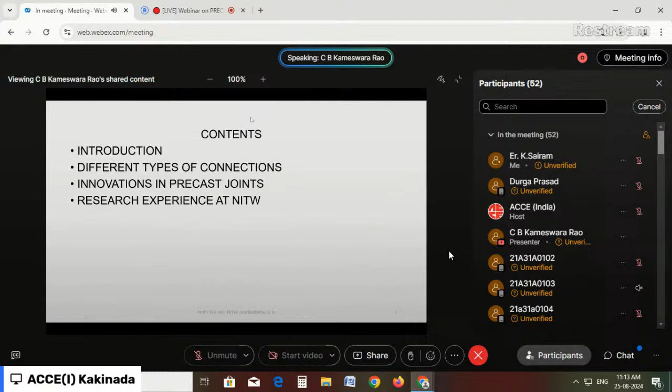I hope I am audible to everybody, and everybody can see me also, hopefully. Sometimes I use my hands to explain certain things, and remember this cursor, this arrow mark, I will be using it to point out things.

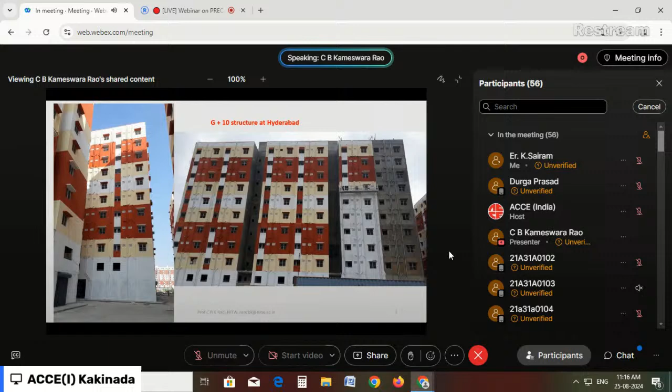So this building, once we use precast wall, precast construction, once it is finished, it's as good as any other equal structure. Now, if we just look into the basic thing, what is the main structural difference?

What is the main structural difference between cast in situ and the precast structures? That means here, what is the difference? Because it's a cast in situ. Difference between cast in situ and precast structures lies in the structural continuity.

Here, in this structural continuity, for in situ buildings, the inherent continuity is an automatic consequence of the construction process, because we are putting the shuttering and casting is done in a single go. So then the continuity is automatic.

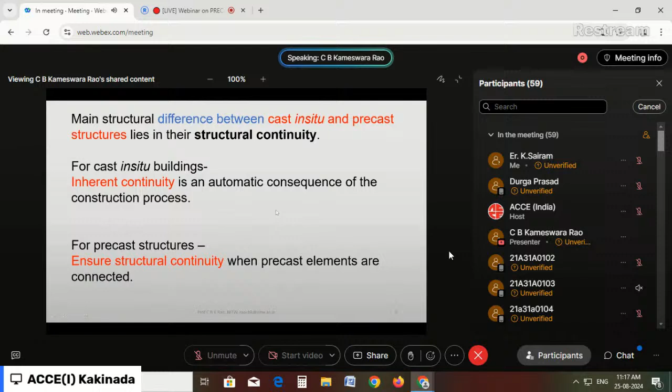Whereas in precast structures, we have to ensure structural continuity when precast elements are connected. That's all the difference. Once this is ensured, automatically the structure will be as good as equivalent to the cast in situ construction only.

Now, simply put, the joint and connection, a simple one. A joint is a meeting point of all the members in a structure, whereas a connection is an assembly of the adjoining members of a joint. That means when all the things are together, we call it a joint, and these members, when assembled, form the connection.

When you assemble it, by what means? You can think of different means of assembling them. A connection is an assembly of adjoining the members of a joint.

Now, what happens at this? Definitely at a joint, the actions of forces takes place, right? Just like our bending moment, shear force or torsion, whatever it is. So depending on that type of force, action of forces takes place at a joint, and the connection is to be designed to resist the action of forces.

So whatever connection we are making, just like in steel structures, we fix up the number of bolts or number of joints or the length of the weld. Here properly the continuity of reinforcement or whatever connection is required, that is to be ensured. Thus we can make a proper connection in case of precast structures also, particularly in concrete construction.

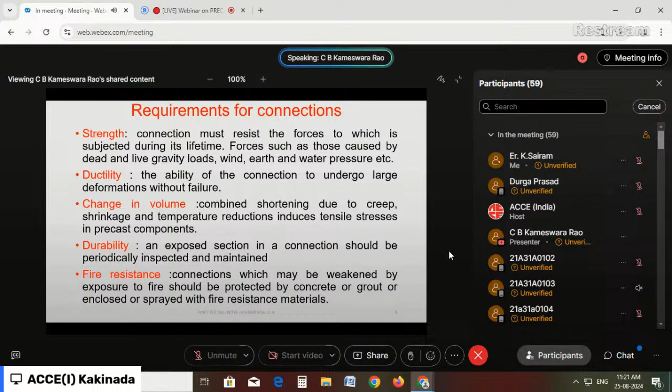Now, there's a code, IS 15916 of 2020. It's much better than the earlier code - this 2020 version is an improved one. It covers building design and erection using prefabricated concrete. This is a code of practice that is available and is to be followed in precast construction.

So connections and jointing techniques and materials - what are the provisions given in the code? Clause 9 talks about jointing. What are the permitted jointing techniques? Welding of cleats or projecting steel - that means from the members you can provide a cleat, or reinforcement can be left and overlapped and welded. So welding of cleats or projecting steel, overlapping reinforcement, loops and linking steel grouted by concrete.

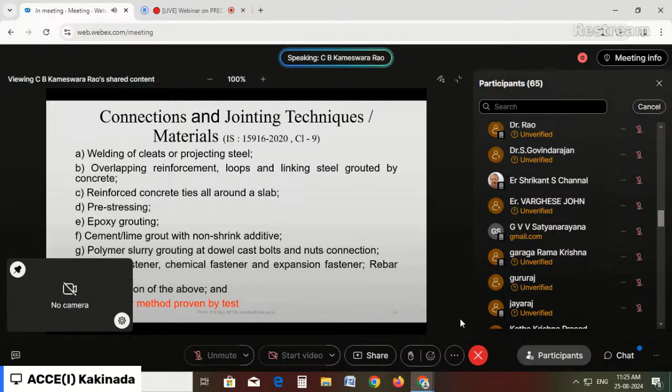And if you can prove it by testing and demonstrate it, that can also be used. So there is a lot of scope for inventing or finding a new method or technology, whatever is convenient to the site. This always happens - in precast construction, there's a lot of scope for invention and introducing new techniques.

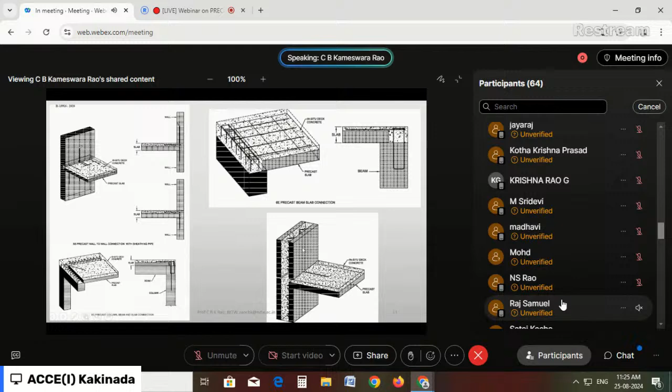These are some snapshots taken from the Indian Standard code. This is a wall and slab system here. Again, a beam and wall slab system, and this again the same way. And these are foundation and wall systems here. Again, these are the jointing by wall to wall systems. These are typically perimeter diagrams given just as schematic diagrams to explain some of the jointing systems.

Now I will explain the jointing system with the help of photographs here. So different types of connections here - I divide these types of connections into column to foundation, wall to foundation. That means first is the foundation, then either a wall can be connected to the foundation or a column can be connected to the foundation. Next comes wall to wall.

Again, wall to column, wall to beam, column to column, beam to column, beam to slab, wall to slab - the classification is done like that. What we are doing is the entire structure is now elementized, actually divided into different modules: foundation module, wall module, column module, slab module, like that. Now they are to be joined, one element to the other.

So normally this is the standard practice. There are some standard methods available. When standard solutions do not fit, and to develop an innovative solution, the designer must be prepared to work with connections in a more creative way.

So here, sometimes the conventional system may not work, then you have to think about a novel system. You can come out with a novel system also. Problem to problem, we can always come out with a proper connecting system. I'll now explain some of the connection systems one by one.

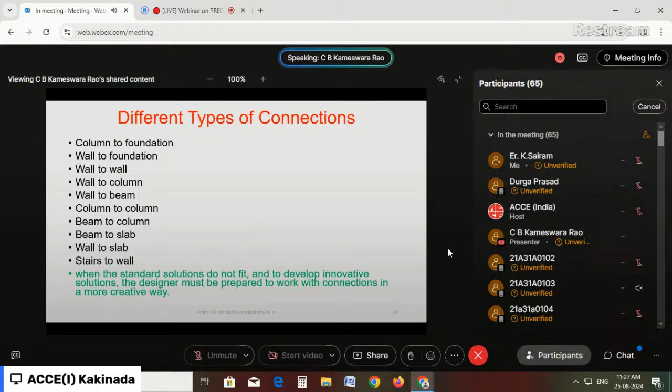Before that, a general classification: there are two techniques adopted for this connection or jointing. One is called the dry joint, the other is called the wet joint. The dry joint means the joint is accomplished by simply placing two members by means of fastening. Whereas the wet joint requires not only casting with cement, but also concreting and grouting material.

That means there are two ways. The members are brought together at the joint and the concrete is poured - that's called the wet joint. Once it gets hardened, all the members automatically become a monolithic joint, as good as monolithic construction. The other way is to bring the members together and use either a nut and bolt system, a pre-stressing system, or some other technique, wherein we don't use concrete.

So this is called the dry jointing technique. In wet jointing technique, concrete is poured at the site, at the particular joint. In the dry joint technique, we avoid this concreting because that's also a big headache in jointing. So dry jointing technique uses some other methods, just by fastening only. Most contractors, construction companies, or people like to have a dry joint because it avoids a lot of the work of making a wet joint.

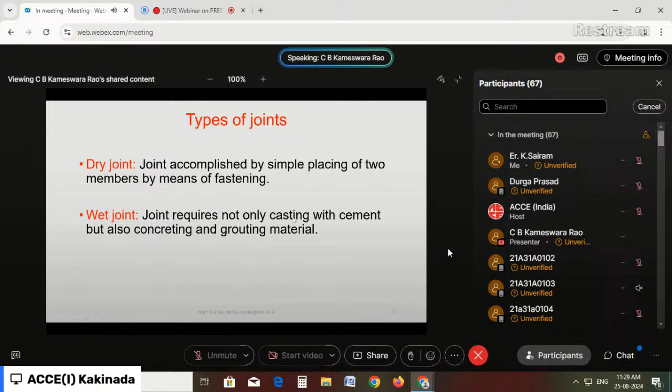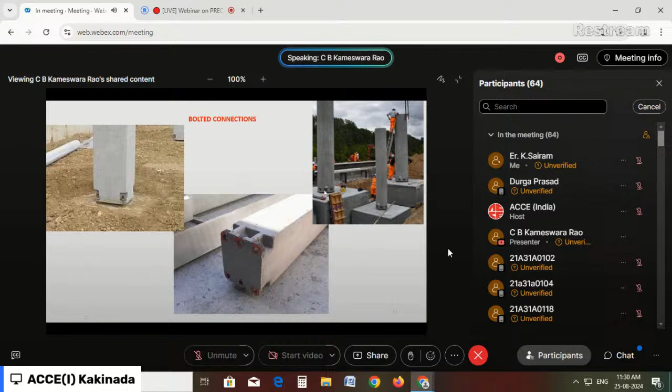So what has to be done is this particular joint should be capable of taking all the forces like shear, bending moment, and whatever it is. So this will be designed such that it will withstand whatever forces are transferred to this joint. This is dry jointing technique, and when we use this, it will be such that it will not get rusted - some concrete will be laid or it will be closed, but that doesn't mean it's a wet joint. It's a dry joint only.

Now let us see the wall panel to the foundation. Here we have to prepare the wall panel, and it will be connected to the foundation. That means to the foundation there will again be a strip-like footing there.

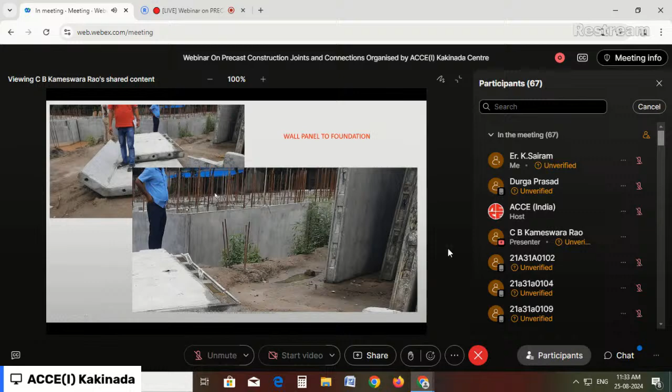Here also you can see the bars protruding outside. So this is the previous slide. These panels, once cast, will have the sleeves inserted right onto it, and it automatically becomes a connection to the foundation. One more photograph will explain this kind of connection.

So this is actually the foundation, strip-like foundation here. You can say it's a raft, completely raft foundation. From the raft foundation, these bars are protruding outside, and these are the wall panels, with sleeves here inside.

These sleeves are brought and this wall panel is brought and kept on this. Automatically it gets locked into it. Then here you can see the grout points. The grouting is done. So if you see here in the detailing part...

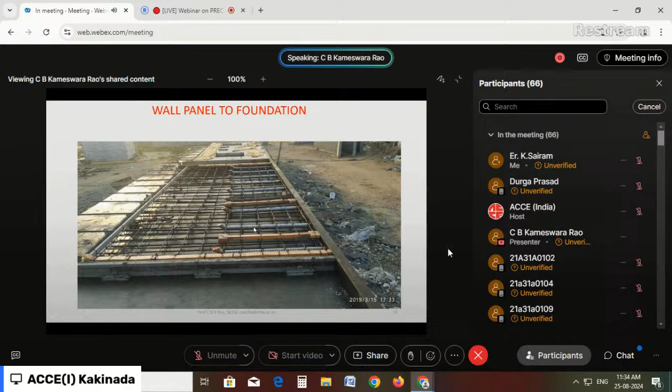Once this is a sleeve, automatically corresponding to this there is a bar. So precision is required in this while casting. There must be proper alignment. If there is a misalignment, it automatically becomes difficult to insert these rods into the sleeves. So a high precision is required, though of course there will be tolerances, but it can be done.

So this is the wall panel and foundation connection. This is a finished product. You can see here, this is the foundation, this is the wall panel. In this wall panel, one more wall panel is inserted. So like that, the entire construction can take place.

I'll take a few more examples in order to explain further. And since such gaps are to be closed, that will be closed also. I'll explain that too.

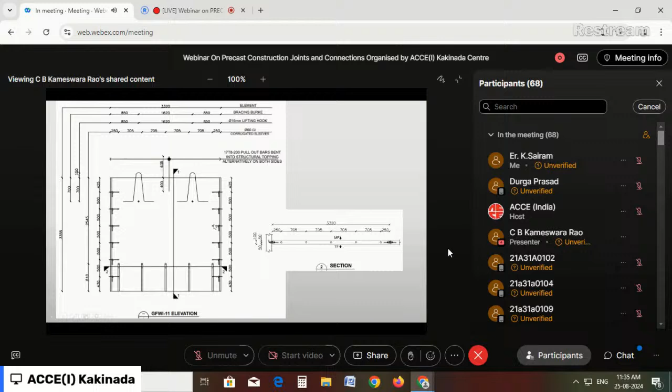While preparing a drawing for this particular precast construction, a lot of details are required. So here is a general drawing, but I took this to have better visibility, presented piece by piece. So this is a drawing which explains how these sleeves are to be provided.

The drawing preparation in case of precast construction - in ordinary construction if you make around 10 drawings, here we may have to do 10 times the drawings. So very detailed drawings are required, and every minor detail is to be completely explained. Otherwise production becomes difficult. For the production purpose, we have to provide all the details in this.

So here you can see this is a corrugated sleeve, this is to be shown. This is a bar that is left over, which will insert into the next one.

And in this drawing we will also have to show the MEP inserts, because these are PVC conduits for electrical and plumbing activity. We have to show exactly where this is to be placed and all those details, so that it can be inserted right into the precast element. So once the element is done, there is no need for chipping off or anything.

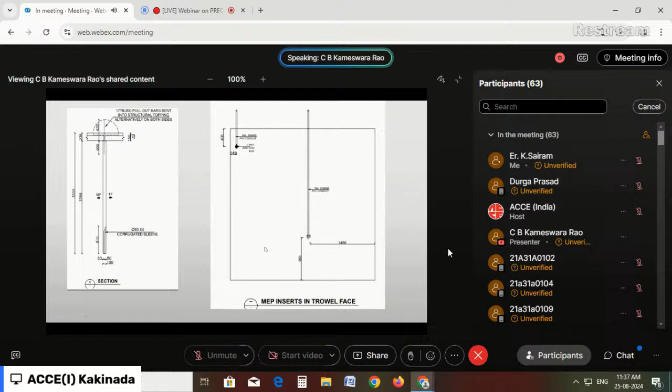This is a detailed drawing. Now let us see the slab and wall connection.

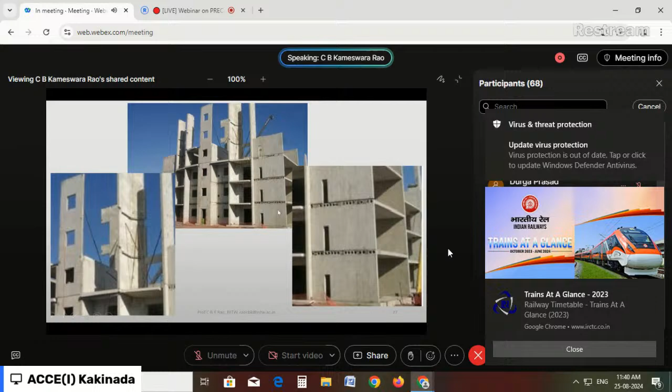That means this one panel is actually made in order to form a three-storied panel here, whereas here this panel is a 1-storied panel. So depending upon our elementization, our modularization of the elements can be done in such a way, depending of course on the weight the crane should be able to lift. So suitably I can make a single wall panel or a 3-wall panel, and these 3-wall panels you can see here are supported and resting on it.

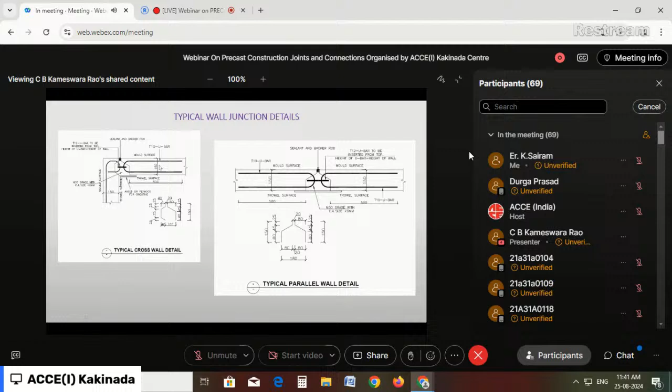So this is an example of an L-shaped connection, and this is for the continuity of the member side by side. Here the bars are looped like this. If you observe my pointer, this particular part is left open. That means a precast unit, this is one unit, and this is another precast unit having an uncast part like this.

These two parts are brought together, and there is a small gap of 5 or 10 mm, which will be closed with a backer rod. Some plastic tube will be inserted, and here we will put another stopper arrangement. So these are the loops that are protruding outside from the precast unit. Then these are connected, and this is grouted or concreted, whatever it is. Thus I make the joint, one kind of joint, as the L joint I can make.

So you can see the details of this particular connection here, and how actually this grooving has to be done. So every detail needs to be given. Once this cast element is done - this is wall one element, this is wall two element - then this can be jointed. Similarly, the jointing can be done for getting a continuous wall here.

So here is another loop here, there is another loop here, here is a backer rod and it's closed, and you can pour concrete. This is the detail at this particular joint, the place where we pour the concrete. So this is the detailing that is required, and hence we can achieve the jointing of wall to wall, either at the corner or at any other intermediate joint.

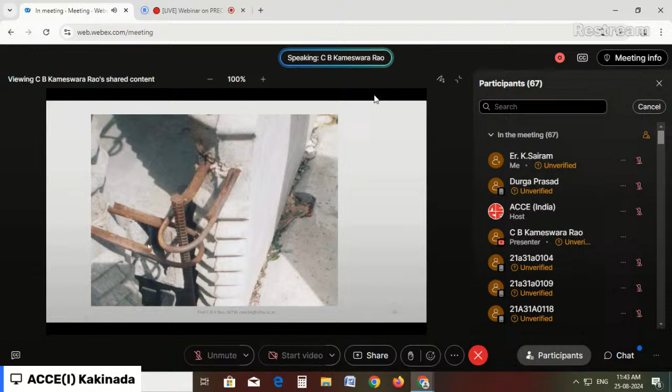So I'll explain with the real pictures here. You can see the corner joint - this is a U loop here, there's another U loop here, right? If the U loop is not directly done while making the element, the bars are just left over, and this U is made and welded so you can make a U loop connection here, and a bar is inserted, and here the concreting will be done.

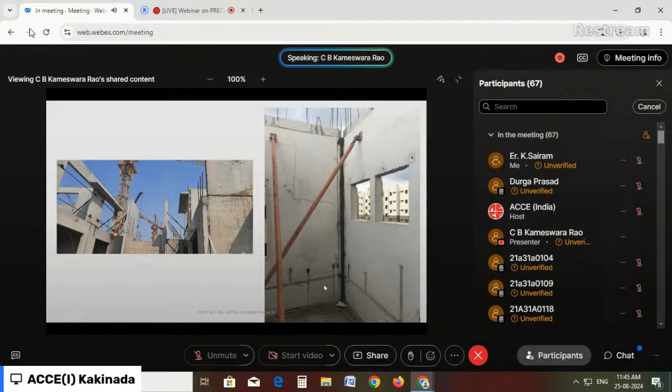Further, the loop here is provided, loop to loop. You can see the ground floor - this is the structure I showed you in my first slide, already finished right up to here. And this is the one going up, right? The ground floor wall, next floor wall, and the next floor wall is ready, and you can see the projections here. This wall will come and sit on this, and the next floor can again be erected. So this explains the method and sequence of construction and jointing of wall to wall, and wall to foundation.

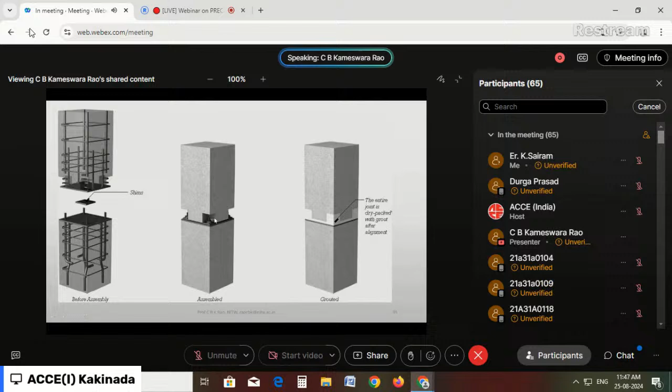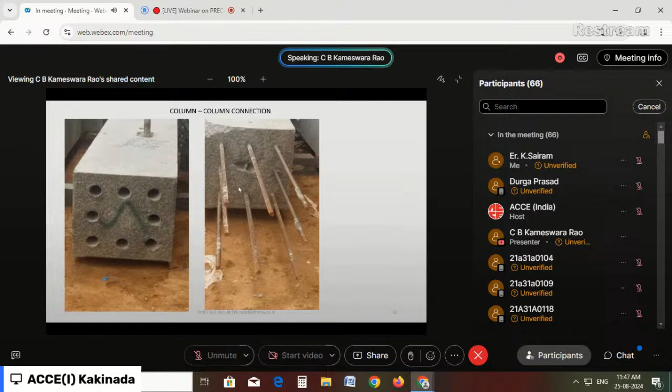The other method is we can provide sleeves in the column, and the bars can be left over, and the column can be kept one over the other. That means these bars will go into these sleeves, then it can be grouted. So then the entire thing becomes a single unit. So this is column to column connection, either by a bolted connection or by the grouting connection.

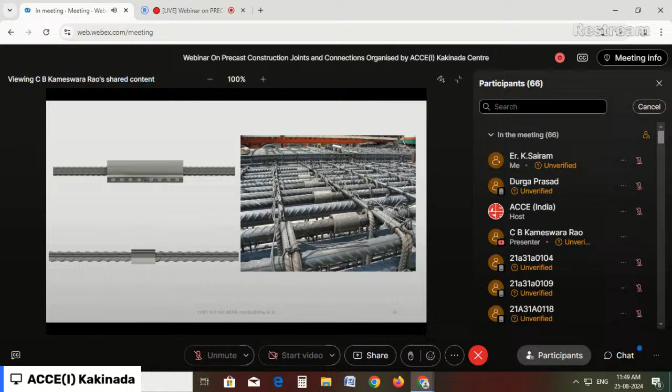Now beam to column connection. Let us see some examples of beam and column. Of all the things, the beam column connection is the most typical. I can connect wall to wall, wall to foundation, wall over wall horizontally without much difficulty. But when it comes to beam column connection, it automatically becomes crowded. Even in monolithic or conventional construction, the beam column junction is very typical, with a lot of reinforcement making concreting difficult.

And more so in the case of buildings with precast elements. Let us see how this is being done. I'll try to explain with the help of photographs here.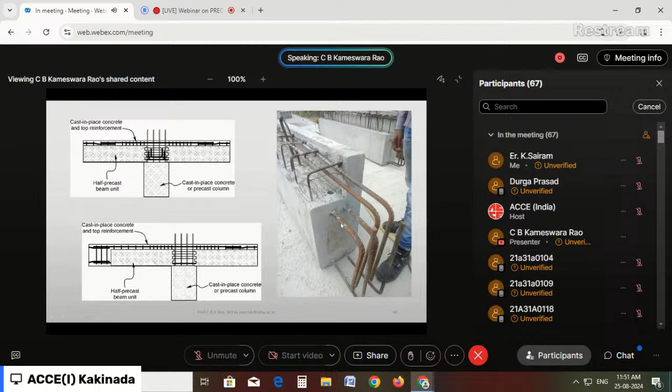These top bars are bent and taken into the column, and the bottom bars are also bent and taken into the column. This becomes a really congested area, a typical challenge where we have to deal carefully, and detailing must be done such that there will be no clash between these bars.

You can see this is a precast beam again. Out of the entire depth, some projection is left for the width, and our slab can come and sit here. This you can see on both sides, used for seating our slab. These are the projections coming out - our shear loops, shear rings - through which I can put the reinforcement. These are the bottom bars taken right into our column.

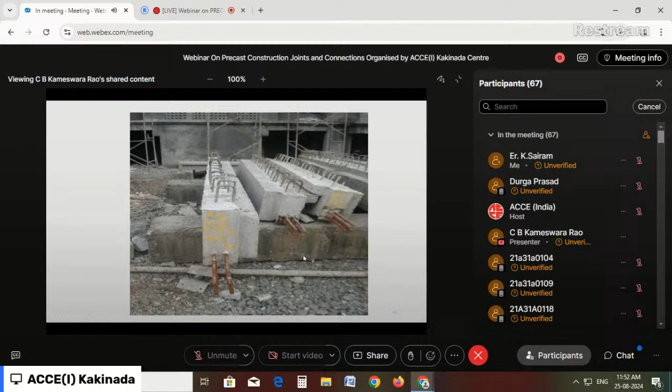I'll show some more photographs to understand this kind of arrangement. Normally, to keep this beam in place, we require a corbel, because proper seating is needed. A corbel is provided to the column, and on the corbel, the beam will come and sit.

Now, for arranging the reinforcement, it can be done with the help of a cleat connection, or it can be a cast-in-situ construction - a wet jointing technique. Typically, you can see how the beams are placed on the columns here, with the shear loops left over. This is one stage, and the next stage also you can see.

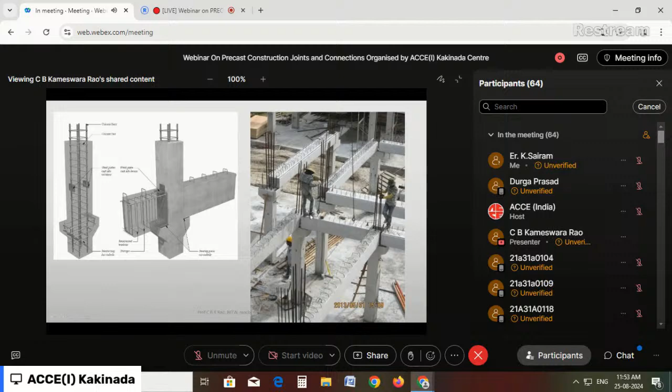Here you can see this is the factory at Vijayawada. Now this is a column. You can see the column, with projections made such that the other beam will come and sit.

You can see this is the beam sitting here, and this is a beam sitting on this one. Now this one, the column behind this is one floor, this is the second floor, the third floor. That means if I say take the ground floor, first floor, second floor, the entire three level column is made as one unit and brought to the site. And at some points only one floor level columns are used. It all depends on the elementization here.

This will explain how the beam is kept on the column, further explained with the help of a few more photographs. This is a column. In our design, in our structure, not all the beams may have the same size, some sizes will be less, some are deep beams. Here you can see this is a shallower one, this is a deeper one. There can be a depth of the beam here more, here less, and we have to match it, provide proper corbel, and invent a novel method of placing it. It's a small piece, you can see here, they are brought and kept on it.

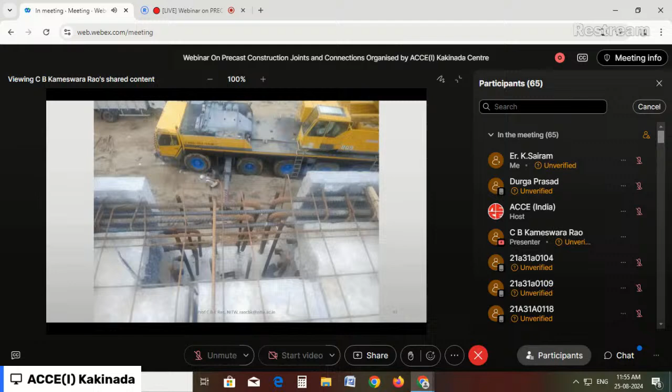Now you can see this, as I said earlier, this is a beam. The top rings are there, reinforcement is left, and in order to get continuity the bars are left, already threaded, and L-shaped bars are taken. The threading is done and they are connected, such that there will be a monolithic construction, proper jointing, and continuity of reinforcement achieved. So here this is bent and taken to the column, and when there is going to be congestion, then we'll use this kind of coupler. An L type of bar is bent and threaded, and they are connected.

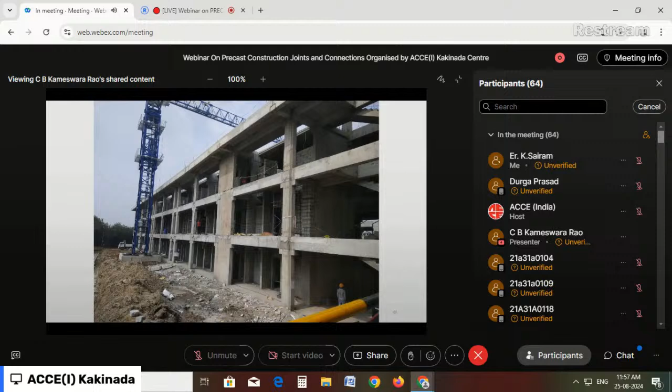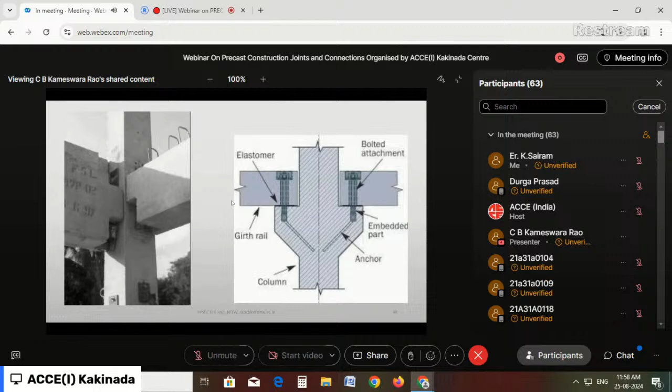This is yet another way, as I said, you can come out with different ideas of connection systems. This is a column, this is a small corbel-like thing, and this is a beam. While casting, the beam is cast with a projection, such that this will go and sit here, just like that it is sitting. This projection, this end, allows me to have a seating arrangement, and this is the wall. This acts like a side shutter, a shade shutter. In between, inside is the hollow region.

Once this is placed, I can put concrete right into it and make it a continuous one. The projected reinforcement can be used for continuity, fixity, and a monolithic connection. This is a hybrid connection with shell beams, and like that we can innovate it.

Further, you can examine these particular sleeves which are used to run the reinforcement from one side to the other side. This will be running from one end to the other end, and reinforcement can be run on this side. So several innovations can be done.

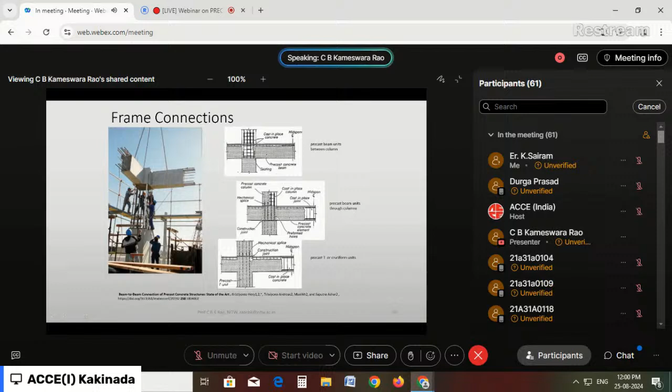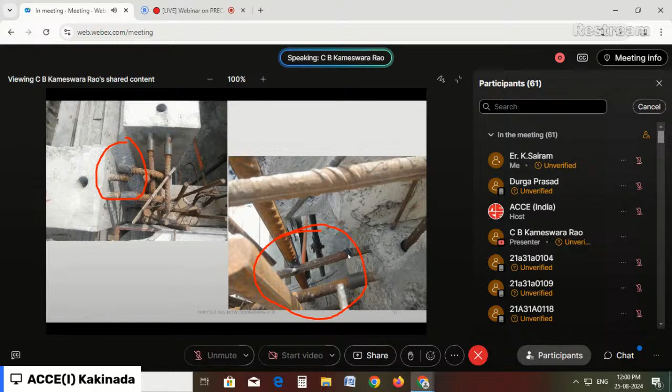This is a cruciform joint, a plus kind, where the reinforcement is straight away inserted right into the column. Proper continuity is achieved by this in beam column connections. They should be careful while doing it so that no such mistake happens, and welding, when done, should be done properly.

Now the slab beam or slab wall connections. These photographs will explain how this connection is done. The first one is the slab unit. Again there are different types of slabs - you can make a solid slab, or a filigree slab, or hollow core slabs, or double T beams - different techniques for the slab system.

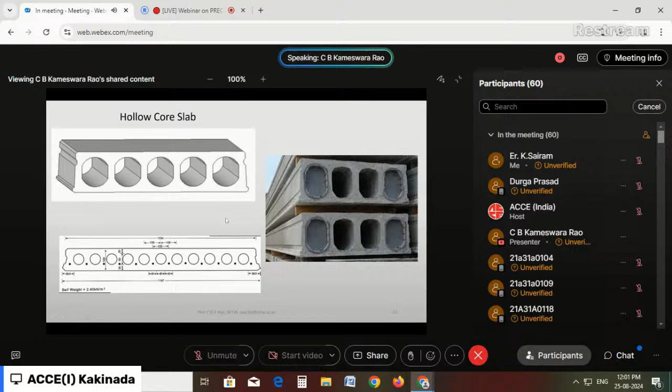One of these is the hollow core slab. Hollow core units are manufactured, brought to the site, and placed on the beam and slab system.

Now you can see - let us say this is the wall units, and on these wall units there can be a beam also. These wall units are already erected, and from wall to other wall the slabs are laid. On the wedges, as I said, 110 mm is used for placing it.

After placing, in this hollow core, one of the hollows will be cut like this. Once cut, the bars protruding outside from the column are bent right into the slab itself. Since the entire thing is hollow, the end part of the cutting will be closed using polyethylene or something similar, so that once concreted, the concrete will not go into the hollow core slab. Once this is bent, a fixity automatically comes into it.

So this is a wall unit, and on the wall unit the slab unit is placed. This explains this particular portion, as you can see, with the propping up shown in the next slide.

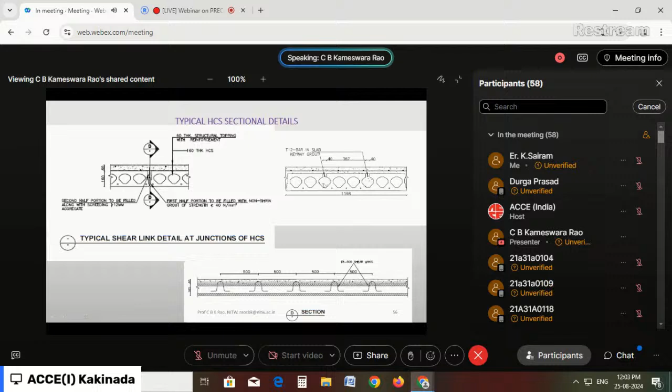Then it will be concreted. On top of the slab, again using this reinforcement, concrete is laid - this is called the topping, and the topping concrete will be laid on it. I will explain with the help of some photographs. These are the sleeves through which reinforcement is inserted right into the slab itself to achieve fixity or continuity.

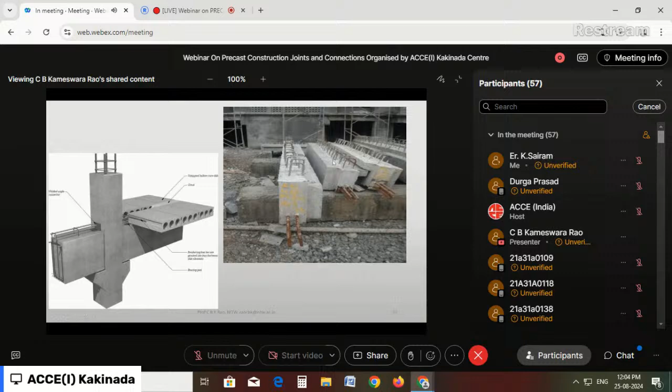Now this will explain how the hollow core slab is placed on a corbel column, a corbel hollow core slab. Again, this is a place where we do not allow any concrete to go inside. The stopper arrangement and the reinforcement will be continued. So this is a detailing part for the casting and construction.

Now you can see how the whole thing is made. This is a column, the beam is placed on it, and the reinforcement will be protruded. On top of it, the hollow core slabs are laid, and you can see these cuttings through which the reinforcement will bend, and on top of it we'll put reinforcement. This is called the topping reinforcement, and topping concrete will be laid, such that the whole thing will be made as one monolithic unit.

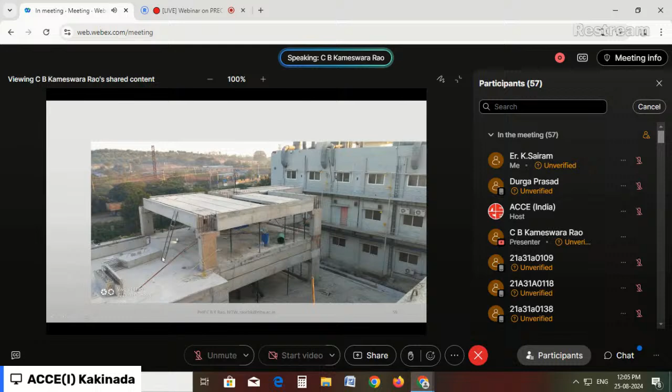Okay, the finished product you can see, under this mesh all these units are the hollow core units. From between the joints of the hollow core units, you will see these rings like this.

Through these rings this reinforcement will be passing. So the hollow core unit with these rings act like a shear connector, and with the top reinforcement and all this, these are the beams, right? Once it is cast completely, the whole unit becomes one unit only, a monolithic construct. It's as good as the cast-in-situ and monolithic construction. So now this is a finished product.

You can see the column and this is a beam, and we have the hollow core units. This is a finished product you can see. A few more photographs will explain this pattern.

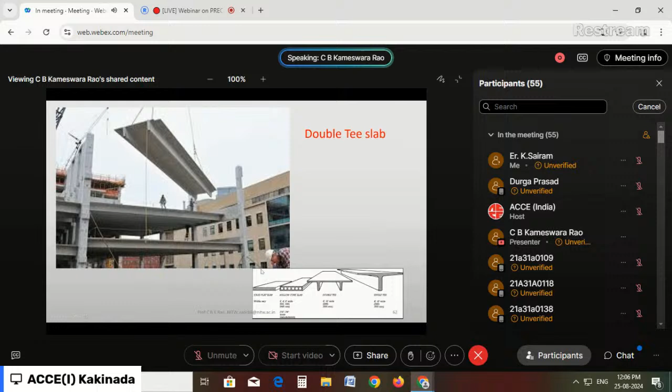We can use a hollow core unit, or a double T slab, or a solid slab, or a single T slab, right? Because the double T slab is kept on the walls at the projections here.

Now we have seen foundation and column connection, foundation and wall connection, wall to wall connection, wall to slab connection, and column and beam connection, and on the beam the slab. Also, you can see here the finished slabs.

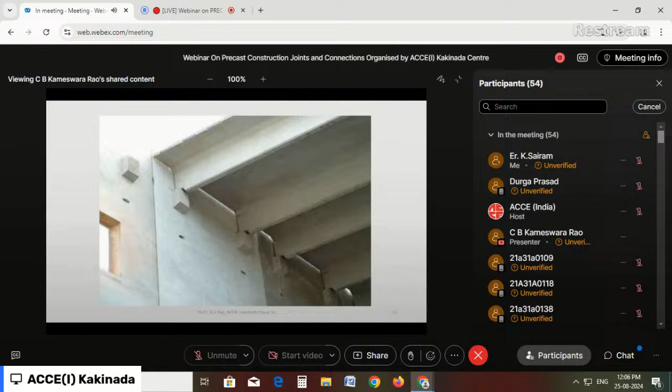So this is a staircase. The staircase are also made as precast units. Once the staircase is made, there will be sleeves. The reinforcement can be protruded right into it, such that once it is placed, that fixity can be achieved. So this can rest on it, and reinforcement can be protruded. All precast.

Such staircases, I'll explain with another photograph. This is a precast staircase unit. You can see this hole here. The reinforcement will be protruded right into it, and it will be grouted.

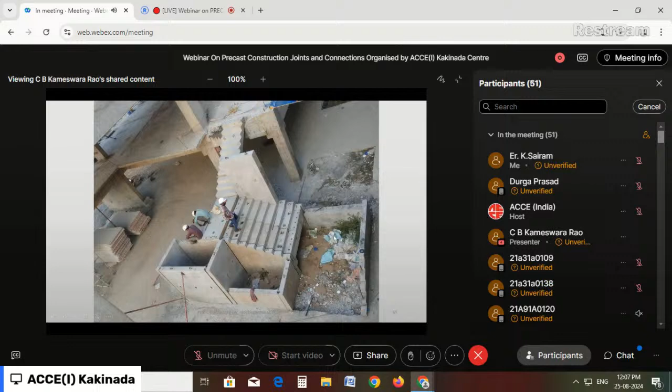So this will be like a shear connector, so that here also they will be connected totally, such that we will have complete rigidity and full continuity, just like any other monolithic construction. All units are precast here. You can see the projections here.

Now some innovations, I'll just speak about some innovations. The time is 12, I think I may take another 15 minutes to complete it. Some innovations here.

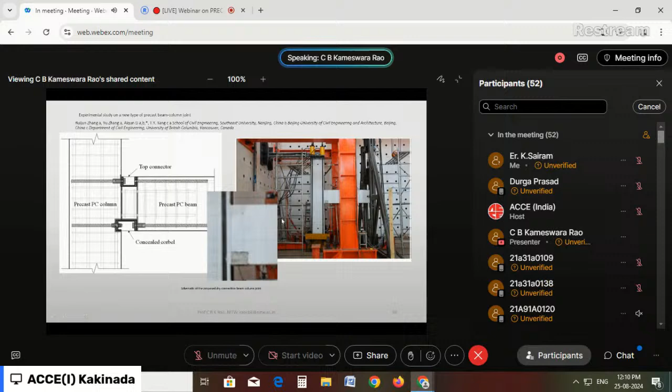Such beam column joints need to be tested before actually, whenever innovating or coming up with a new kind of joint, this will be tested for static load and also dynamic load. This is another kind of joint, right? The beauty of this joint is that whenever we want, we can bolt it, or unbolt and disassemble all the members and take them to some other place. The assembly can be done, and disassembly can be done also. So this is a kind of joint that is okay.

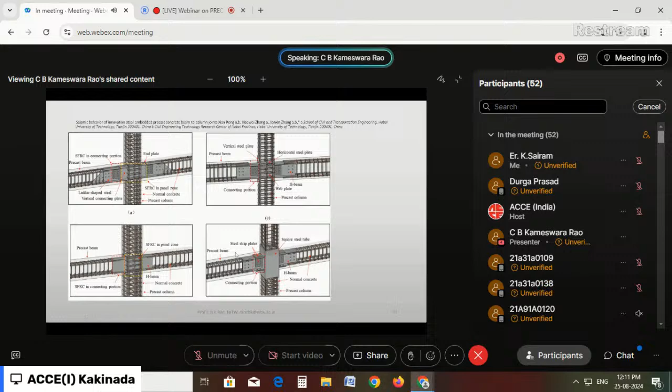Some more details of that particular kind. As I said, this is again a jointing technique. Plates are there, I-sections are used, they are welded, different kinds of connections, some innovations. So such things are to be tested for both cyclic loading and static loading.

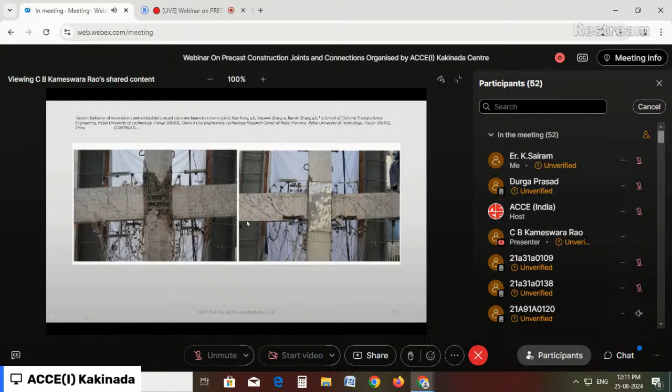So there are all the research and innovative techniques.

Here, as I said earlier, we use the loops here. The U-loops are used in order to join the wall-to-wall arrangement. One innovation is that a rod is here in this particular element 1, which is element 2, a tube is inserted, another tube is inserted, that means there's hollowness there and hollowness here.

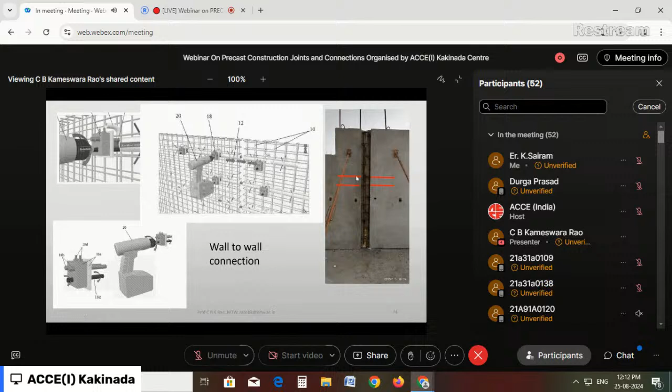Before bringing it to the site, a reinforcement rod is inserted, and something like a screwdriver, a driver arrangement will be there. A small hole will be made here, and the driver arrangement will be inserted just like this, right into it. Then once it is driven, just like a gun, if you push it, automatically it will rotate, and the bar is moved from one side to the other side automatically. Then this is rotated, so such kind of joint is not required.

So it's a simple technique. You are avoiding concreting at this joint. So it's a kind of dry jointing technique. This is again a patented one, PRECAST construction company in Pune, they have made this invention and patented it.

Another way, it need not be completely concrete, it can be a composite type. So you have here the steel frame, the beam and columns are steel, and the decking is done by hollow core units, which are placed on it. Proper welding and proper shear connectors will be done, and the structural concrete topping is done. So composite kind of construction can also be taken up here.

So not only in buildings, precast techniques can be applied to any other structure also, with proper identification of the elements, which can be transported and assembled. One such thing is precast construction of transmission towers. Myself and Prasad made it, and we have verified the design and all those things. I will present it here.

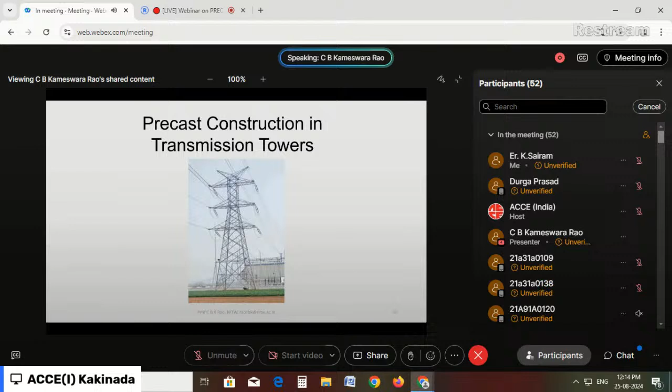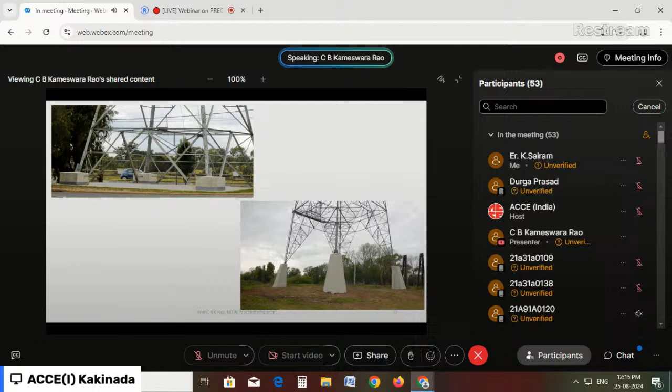So this is a conventional foundation for the large towers, it's a very huge one. In a hilly region, it's very tough to take concrete and do the concreting and prepare these foundations. So one company requested precasting of these elements. This is the conventional construction with reinforcement and all. So this is one technique of precasting of the foundations.

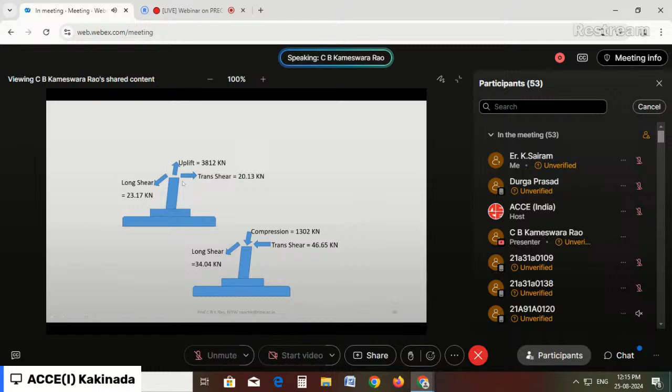Now, this is a problem that we have arrived at, these are the forces on which the foundation has to sustain. This is made into 6 elements: the foundation base element is made into 4 parts, and the top element is made into 2 parts. Totally, this complete precast foundation is made up of 6 elements, and these 6 elements are assembled in order to make the foundation for the tower units.

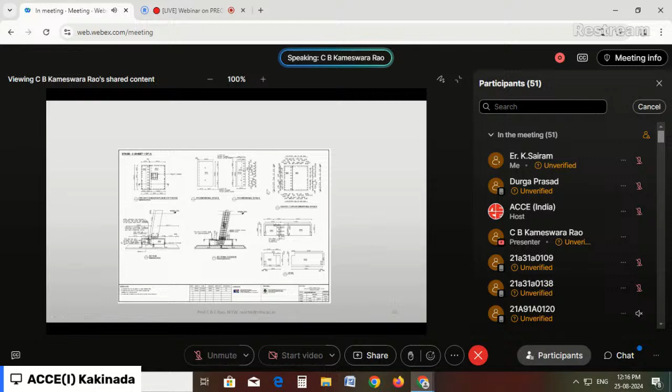The next slide shows the drawings. These are the units - this is one unit, the other unit, and they are joined. This is the top unit, these are the bottom units. Once we join all those things, it will become like one single unit.

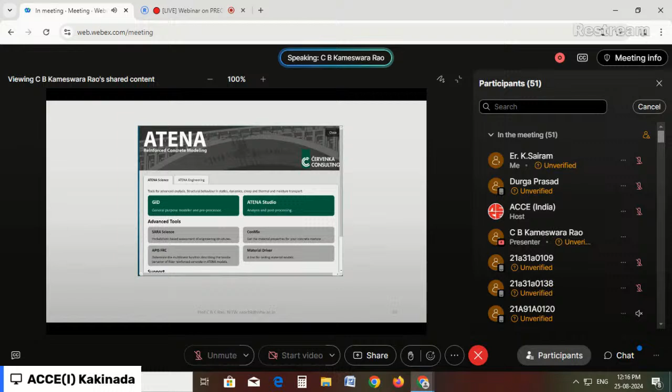This is analyzed using a software called Atena. I have done this analysis modeling, and numerical analysis is carried out, exactly simulating how this is being done with precast elements.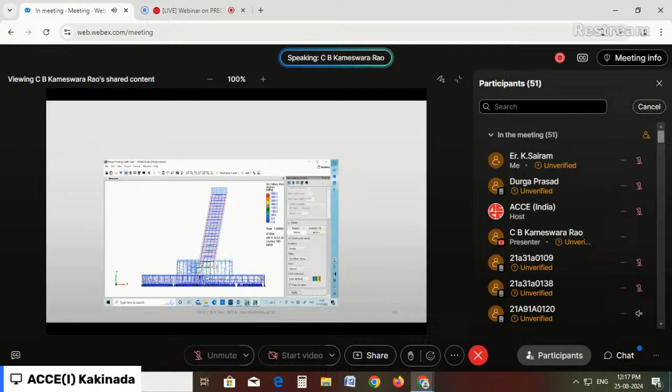Once this is verified, it is proof tested - actual testing is done at the site. In order to conduct that test, we designed a huge transverse beam and a connection system, and a jack system, which I'll explain with the help of photographs.

So this is the test arrangement - the test beam. And this is called the reaction beam.

This arrangement is actually the test piece, here. For this I'll put the jack and I'll pull it or push it. This is the reaction beam.

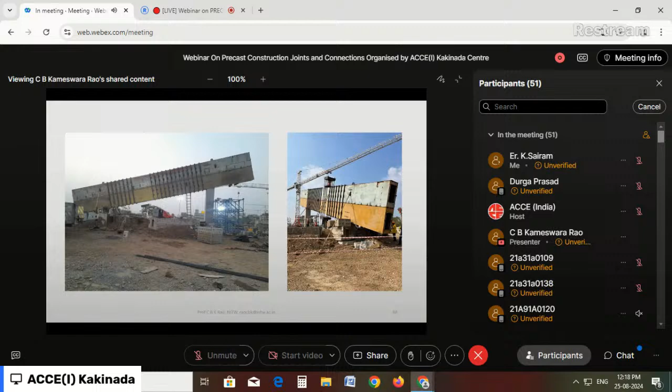The real testing has been carried out at Pune. This will be used for Georgia - the country Georgia - for the precast foundation for the towers. There are a few photographs that will illustrate this. You can see the size of the beam here.

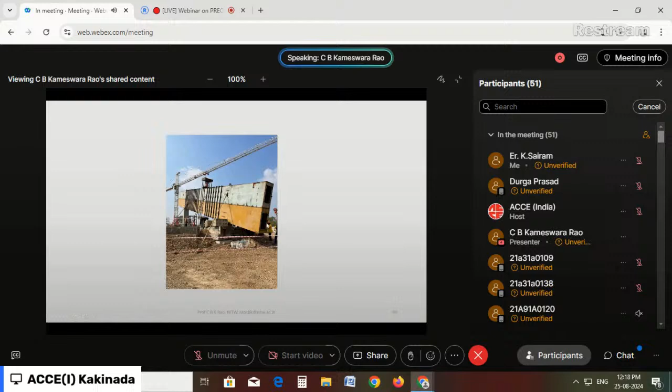This is a man. Now, my experience at NITW regarding precast jointing technique.

Commonly, if you look back into our previous slides, where exactly we find difficulty is the continuity of reinforcement at any joint. Once the reinforcement is made continuous somehow and it is cast, automatically all the units become a single unit.

For that, what is the technique? The first one is we have to put sufficient overlap here. If you overlap the bars and concrete it, automatically you get the complete connection - this is the conventional method.

Or sometimes we use the U-hook arrangement, or we use couplers - threaded couplers are used, or grouted couplers are used. Sometimes headed bars are used here. These are the different techniques.

All these techniques are meant to avoid this overlapping. The overlapping can be avoided entirely, or it can be reduced by using headed bars or by these coupling arrangements.

That's right, it's only just threading and connecting it. Here, this is a small shank into which I have to insert the bars and grout it so that I get complete continuity of the bar.

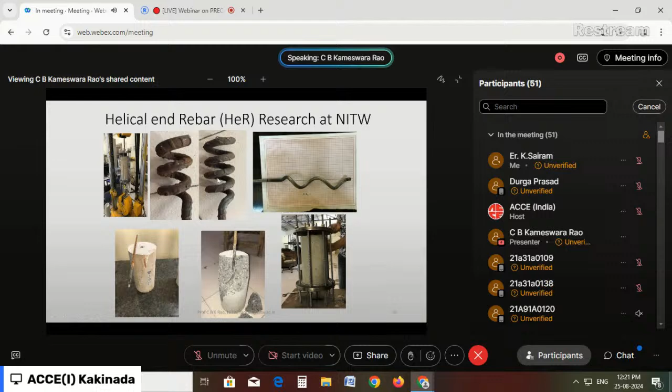Then, as I said earlier, using Atena software, a numerical model is prepared and initially verified by numerically analyzing it. If I insert it into concrete and pull it, how much anchorage will this provide, and how many turns are required - all such things are studied through this finite element modeling and analysis.

Once we come out with the results, a beam is tested in parallel. Here, 3 bars are there - these are continuous bars, meaning conventional construction. And this bar is cut, with one end made helical and another helical.

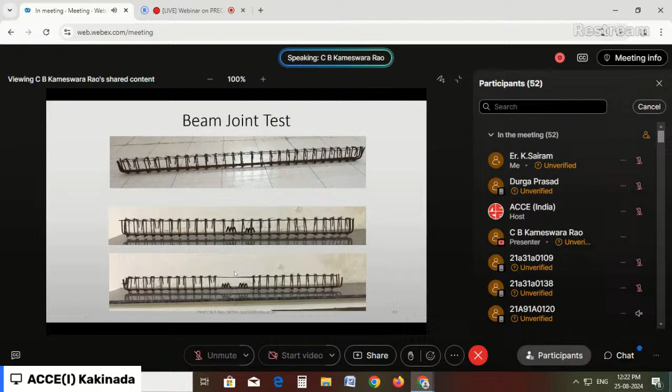They are overlapped. Here I have provided the stirrups, but here there are no stirrups. 3 beams are tested - just a few beams, but it involved quite a good exhaustive testing, a big work - and it's concreted. This is the overlap that is being done here.

Right, this is how we can make a simple arrangement - a spring making machine can be used in order to make this helix.

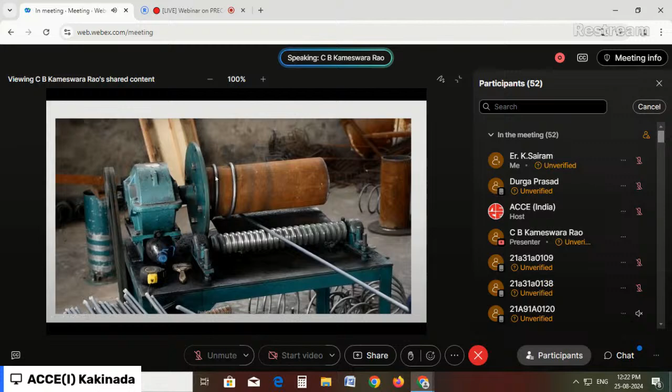So these are overlap joints that are tested, and you can see the beam with continuous rods and with overlap is again verified - they are matching here.

This model is also tested using ATENA software to control the beam, and here is the P-delta curve.

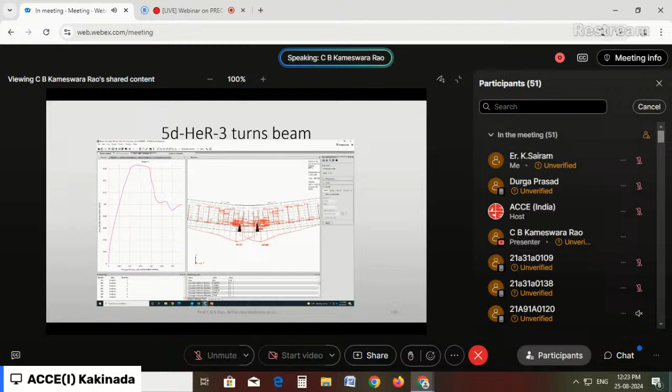This overlap is 5 times the diameter, just 5 times diameter of the overlap with just a few turns. Overall, the joint will be around 12 times diameter. So this is the P-delta curve, and these are matching here.

A patent has been obtained for this - a means of anchorage for reinforcing bar. You can verify this if you look up 528583, which is the patent number. If you search this number in the Indian patent database, you can see all the details of this particular patent. Like this, a few other patents are also there.

Now I am concluding. In precast construction, the major challenge is the joint. I can make the members in the factory with all precision, but bringing it to the site and connecting them is a big challenge. So the problem faced by the precast industry is finding a reliable and economical method to join prefabricated members.

A dry jointing technique is very welcome. Wet jointing technique can also be used, but again there is the problem of concreting, pouring concrete, and avoiding congestion of reinforcement. All these things are to be addressed. Hence, joint is the main issue, and we have to come out with proper and easier methods of jointing the members. And of course, that's the summary and conclusion.

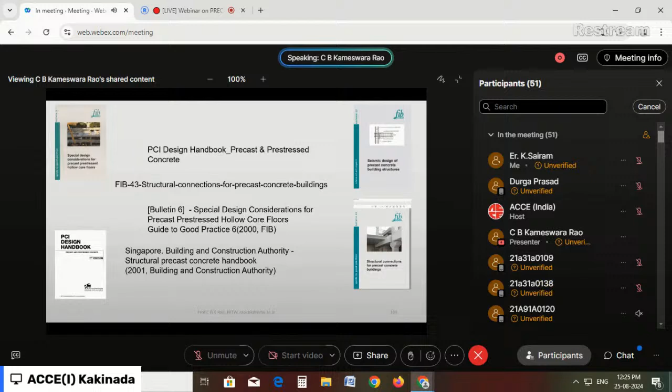Thank you, sir. Thank you very much. Excellent presentation, sir - very practical oriented, illustrating the theory with real site photographs. With this presentation, we are clear that you did a lot of research work on precast construction joints. Now I request the participants to raise your questions.

Good morning, sir. Very excellent presentation, sir. I have two questions. One is with respect to the rebar couplers we are using for the jointing purpose - is it required, from a quality control point of view, to do any testing for some of the couplers used in a project, or is it simply 100% tension transfer from the joint of rebar coupling?

Yeah, it's always good to have a test - we have tested couplers in our laboratory before using them, even while using grouted couplers for the precast foundation unit of a tower. So we have tested the couplers completely, and grout is more important. Grout is the essential thing here - grout also needs to be tested separately, and the coupler along with the grout, the finished product, is to be tested.

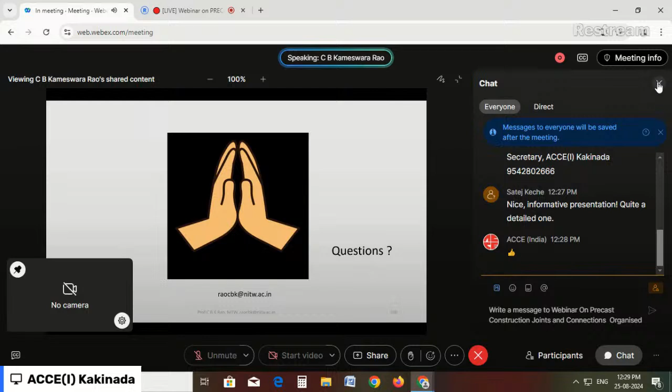Now, in some considerations, what we do is treat the beam as if it is resting and simply supported on a corbel sometimes. Then you have to put that as a joint there. So it can be treated as a jointed structure also. Once the analysis is carried out, it's just like what we do in any other structure, and whatever model you are making, if you are treating it as a hinge, then that hinge is to be realized there.

Am I clear now? Yes, sir. If you permit me, I have two more questions, sir.

Sir, regarding the elastic deformation curve of the entire structural system, is there any measurement of the elastic curve of the total system approach for precast buildings?

No. Whatever clauses are applicable for any standard conventional building, all those are applicable even for precast structures. Apart from that, there's one more clause for precast structures: you have to analyze the structure for progressive collapse also. This is an additional condition given for precast construction buildings.

In case any particular member collapses by chance, there should not be a total collapse of the structure. So whatever conditions you take, deflection criteria, sway criteria, or drift criteria, whatever conditions are there, all those are applicable even for precast construction.

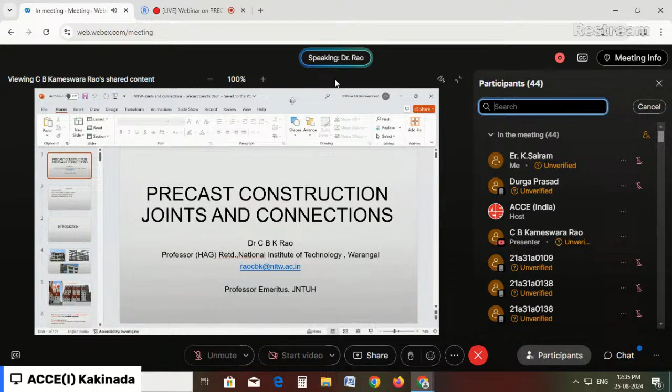What is the helix angle you are proposing, sir? The helix angle is to be designed based on what my requirement is. I have to minimize the volume of the joint totally. So I have to use the minimum diameter possible, and I have to use the minimum number of turns and minimum possible pitch, for which I developed the design equations already.

For that it is designed. There is a question in the chat box, sir. What are the... could I complete with Dr. Rao? Is it clear? Dr. Rao, did I answer your question? Clear sir, it's clear. All right, okay.

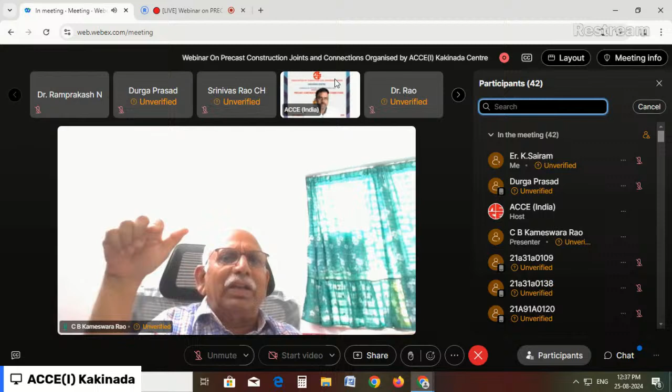What are the notable challenges for installation and transportation of precast beams, columns, slabs? Any other challenges? Yes, we have to properly design. That means while designing, while selecting the element itself, what is your crane capacity - is it a 5-ton crane capacity? Depending upon the crane capacity and also your trolley length, your vehicle length. I told you there is ground, first, second - 3 floors. A single column is cast in the factory and transported to the site. So your trolley length, trolley capacity, and crane capacity - these things are to be studied. Based on that, we actually design the elementization. So elements have to be checked first. These are all interlinked things.